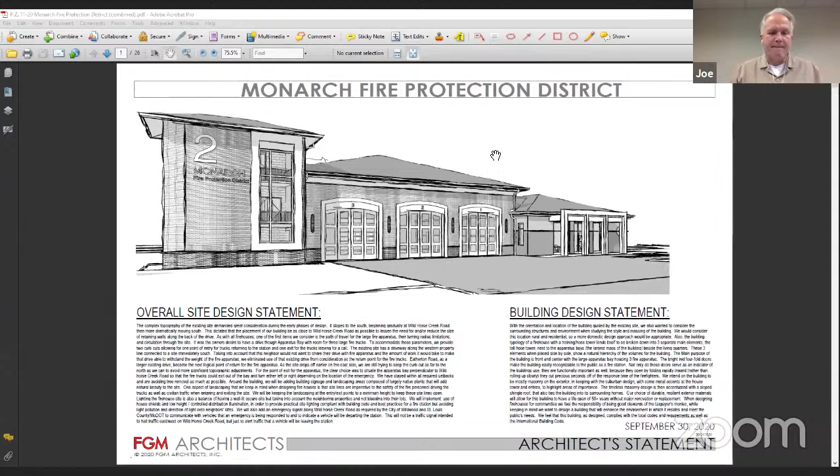All right, so we provided the updates to the package submitted last month, and there's not a whole lot to say here about the overall design statement and building design statement. Really, the edits are more within the presentation.

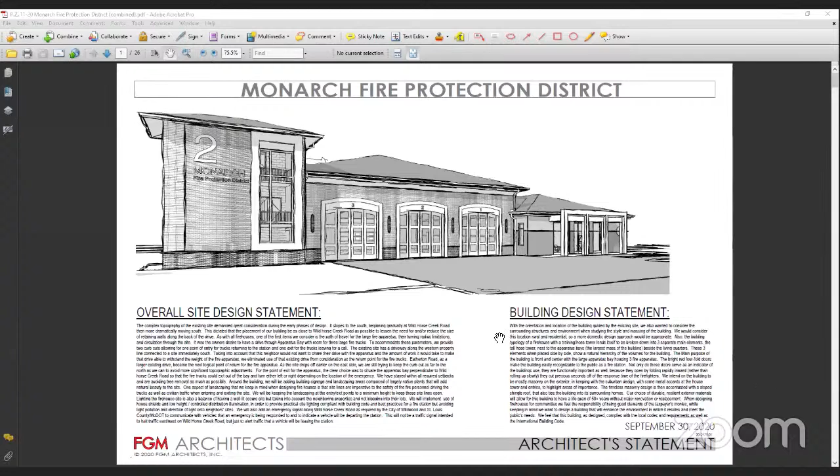So if we want to go ahead and go to the next sheet, the site plan. A few things here, a few of the notes that were taken last time. The board asked us to better coordinate these drawings with the civil engineering drawings, which we have done. So these better match the existing canopy to remain, as you could see there on the south side, and the contours, both the existing contours and the proposed contours.

I will mention that we are looking at other studies of this site with the comments from the Planning and Zoning Commission, and we are looking at some other options for this site to address some of those comments and concerns on that list. Some of the things we're looking at is possibly changing the entry from Eatherton to Wild Horse Creek Road and having more of a U-shaped entry instead of having that entry, and looking at how we place the building on the site.

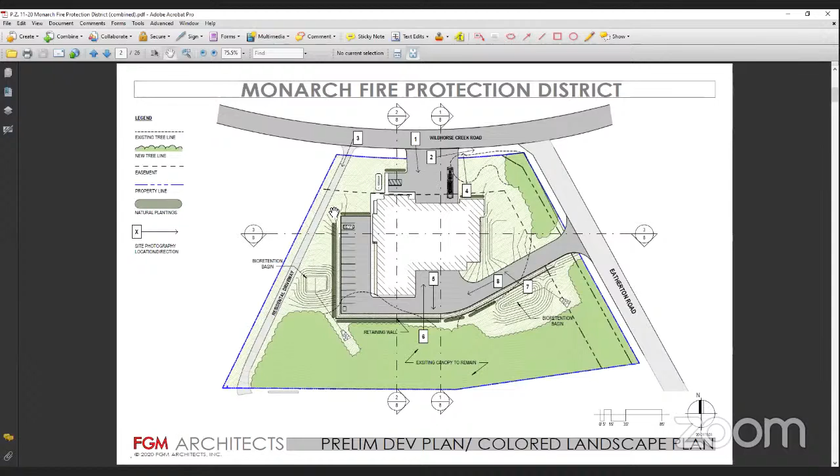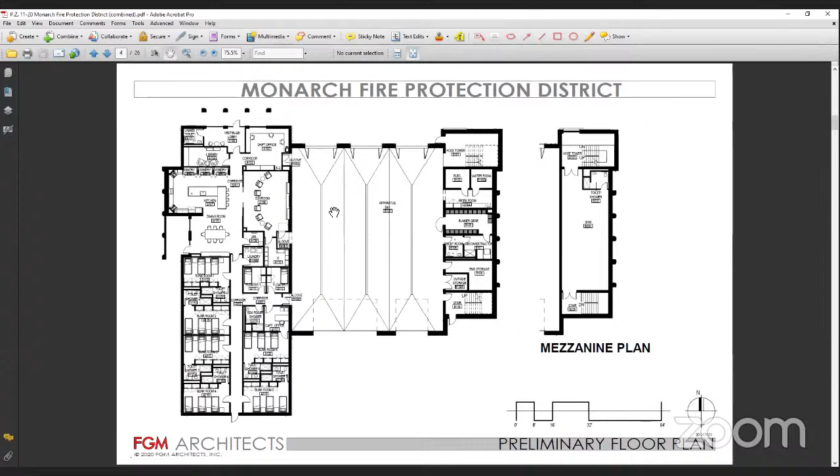Just an update to the floor plan as it currently sits. Overall, the building footprint really hasn't changed too much. We've done some interior revisions to the kitchen and the apparatus bay support, but not a whole lot else to mention.

One of the comments last time on the elevations was better identifying the material palette and where each material is going. We changed the brick numbering to better present this - the main brick is BR1, so we changed that, and then we have an accent brick at the base, which is BR2, and then we have a very small band of BR3 in the corner as really an accent.

Also, one question was asked about the material around the apparatus bay doors. We defined that here, and this is better - it's a stone veneer type product, and I believe these are much more readable than they were before. We did not have these notes before to actually tie this into our material palette sheet.

And the ALU1, that's an aluminum panel, and we're using that above the apparatus bay doors. And then also we're using that as well as above the storefront at the main entry to the right-hand side. So these correspond with the material palette sheet coming up.

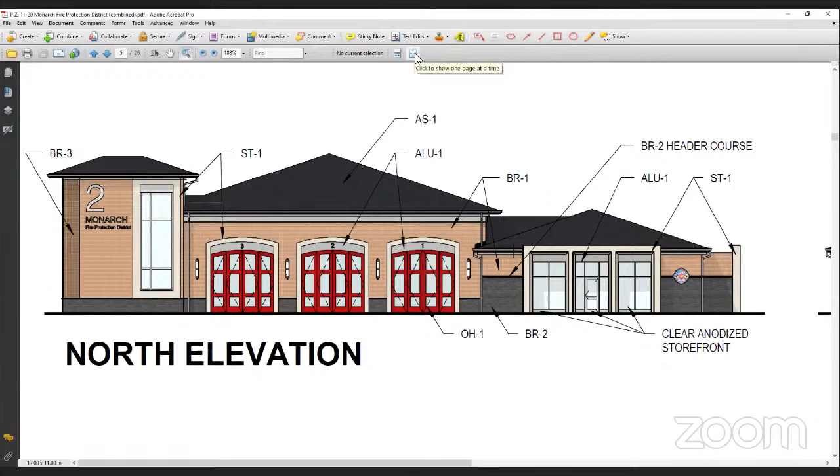So we updated the renderings to better reflect the materials, and I know last time they were harder to read. Hopefully everyone could see them better today at this presentation. So it just helps better define the materials in the palette.

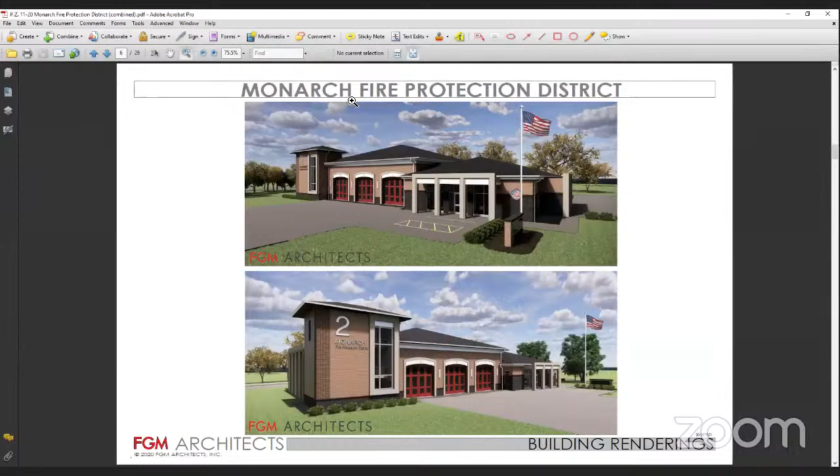So if we can go to the next. So this sheet here, like I said, we reordered the brick types to correspond with the BR1, BR2, and BR3. And a couple questions that were asked last time that I'd like to clarify.

The window system - you asked what color that would be. We have an example here. The aluminum would be clear anodized.

Also, there was a question about the glazing and what type of glazing and what tint you would expect on this building. We have an image there of a similar project, the glazing at that building, and also the stone that we are proposing at this building as well. So that image on the upper right is a good representation of what we would design to.

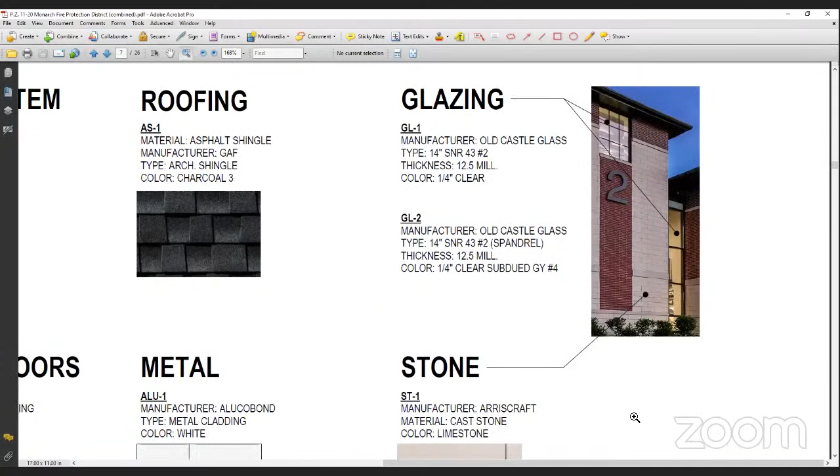That says your glass is 1/4 inch. I'm assuming that's really 1-inch glass. That is correct, yeah - it's 1 inch with 2 1/4 inch panes and then an insulated airspace. But yeah, that is correct, sir.

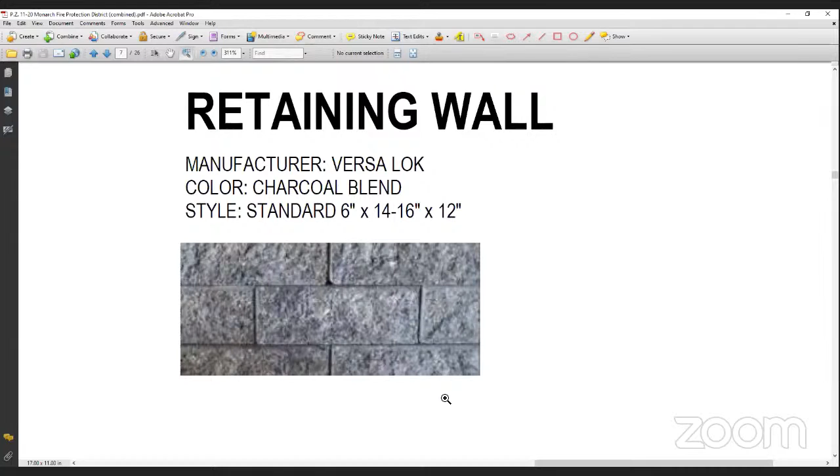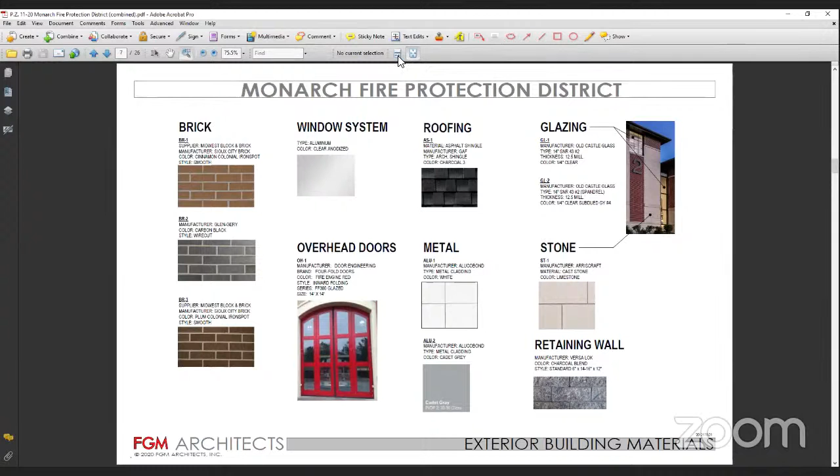And I believe that covers most of the edits to this sheet. I don't know if there's any questions on the materials. Any board members or anyone have any questions?

And you're getting off easy tonight.

I just had one question at least for materials. I know we haven't gotten there yet, but on the next sheet, you have a section of what the retaining wall will look like, and it calls out a 6-foot privacy fence. I'm wondering what kind of material it will be made out of, coloring, all that.

Yes, so kind of walk through the detail. So we have like a guardrail type system first, closest to the parking, and then we have a light pole behind that, and then the privacy fence would be directly behind the retaining wall. So what we're thinking here is some type of PVC type fencing that would be a full screen.

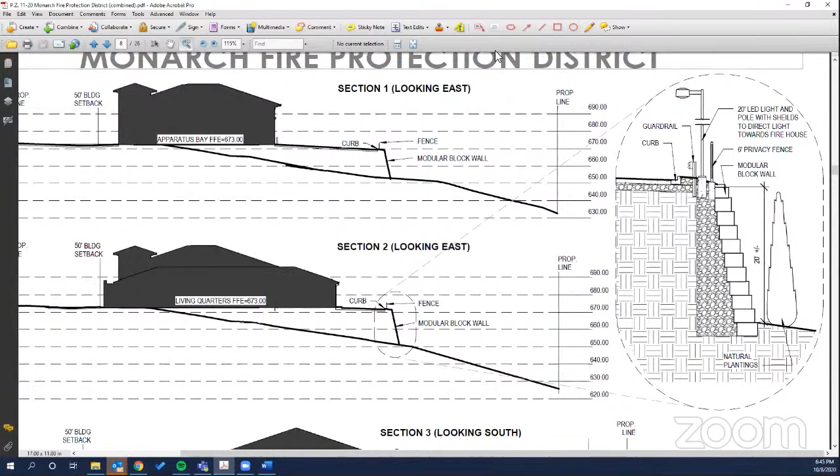I guess one of the concerns that we're addressing is the fact that there will be fire trucks driving up here and other vehicles, and we want to try to screen the light from shining down on the adjacent properties. And also this will act as a visual screen as well to help the privacy of the neighbors.

Also, just talking about that retaining wall, we're also looking at - while the wall is going to be tall in some cases, upward of 20 feet - we want to do a landscape buffer, if you will, or screen at the base of that wall to help. I'd like to see this better fit in with the site and the building, because the site's heavily wooded, so we want to respect that. While we are putting a wall there, we do want to help screen it and make it look like it's kind of part of the environment instead of just a single retaining wall.

Were there any other comments that we made that you want to address specifically?

I guess a couple other comments I'll run through. We talked about the type of lighting fixtures, making sure the fixtures shine on the property, not on the adjacent neighbors. That's something we're considerate of, and we're going to look at putting shields on those to make sure the light shines strictly on their property, on the parking areas. That's something we talked about. I think I've covered most of what we discussed last time, but if there are any questions, please feel free.

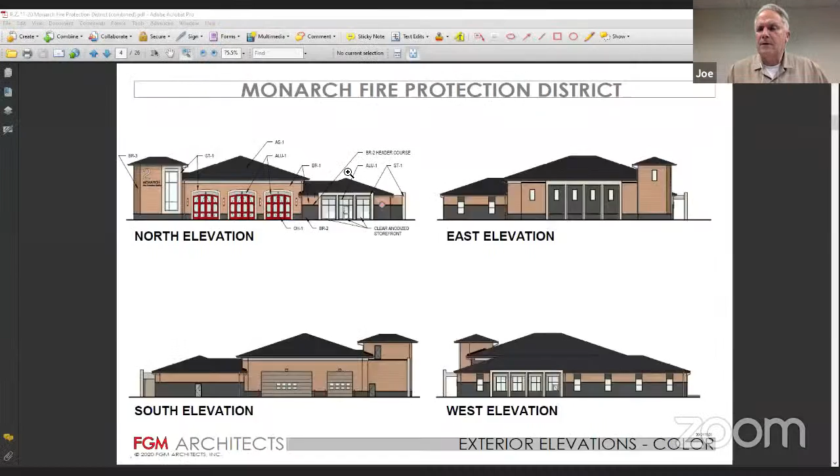That's my hope. So as, again, if the west side of the current building is where they have the employee parking, have the activity center associated with the building, if we can move that to the east side, that means the parking lot's next to Etherton Road, not the private driveway. And for all intents and purposes, as I look at the site plan, the majority of the retaining wall is to accommodate access to the west side of the lot.

So as I say, it even seems to work a little better from the perspective of the western third of the building is the lengthier of the three sections. And moving it to the east, I think, just makes a less disturbance on the site.

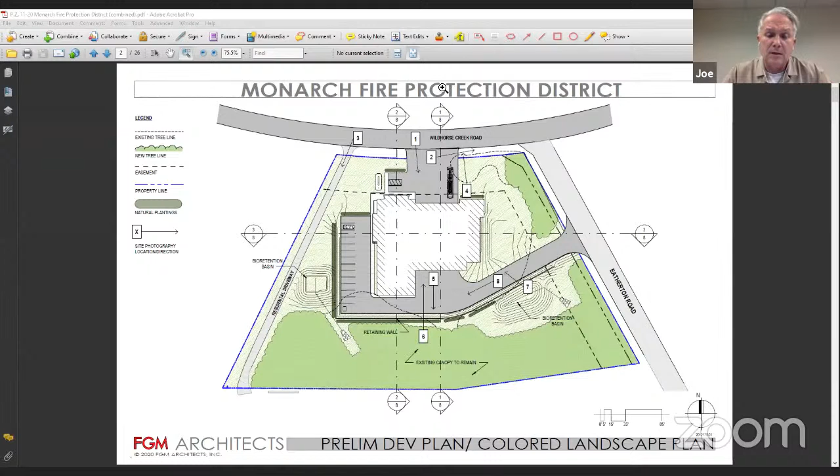Now, again, this is just a suggestion, and the Planning and Zoning Commission will ultimately make the decision. And there may be some practical aspects that I don't understand in making the recommendation. But I think at the end of the day, the fire district has presented an aesthetically pleasing building that complies with the general guidelines of the Architectural Review Board. So my suggestion would be, if there is consensus, to act favorably on the building, and let's see what happens. And if it needs to come back, it would be just another meeting.

Okay, I think that's very reasonable because I think the building is at a point where it would be approved from comments left. I think we would all like to see something better done with that wall, but from what you're saying, it may shrink to the point where it just doesn't matter.

Regardless of its size, we can bring that back to you. As you know, the retaining wall design may be one of the last aspects that an architect may have to deal with in terms of just creating the building, the architectural drawings for the building and the improvement sets, so to speak. But we'll bring that back to you regardless.

Okay, I agree with you on the site plan issues. It does seem a little bit that it could be a little bit more efficient laid out the way you were describing. The one thing I do want to mention, it's not really an ARB comment, but the fence, the light posts, and the guardrail.

The highway guardrail on top of the retaining wall puts a lot of stress on the retaining wall, especially the top few courses. If things push on those, or if there's a little bit of erosion happening under the slab or behind the wall, which I've seen before, it can eat away and cause the top of that wall to fail. So there are some very specific details on how to hold up a fence and a guardrail on top of a retaining wall, and they're all structural.